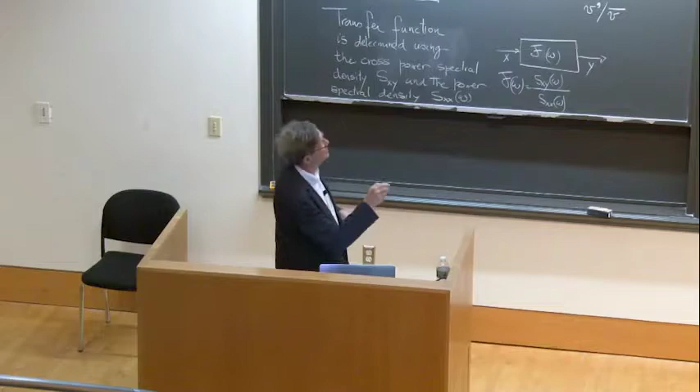Also in this confined case, which is closer to many practical systems, you can explain the switching that takes place, the various modes you are triggering. You start with a given mode, mode 2 for example, and move to mode 1, or you go from a high frequency to a low frequency. You start with a high frequency and then fall on this low frequency. So all this is very nicely explained by this describing function.

All right. So this has been used.

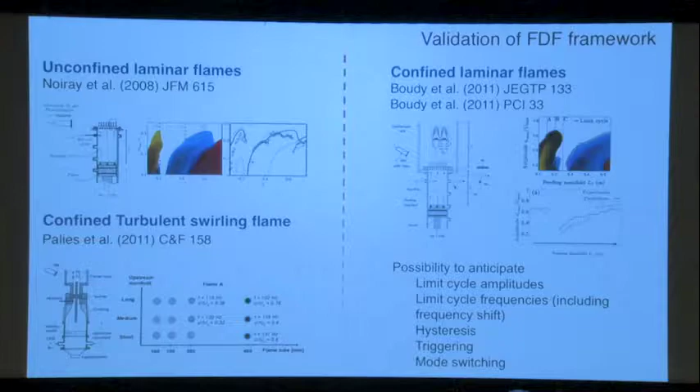We use this framework, for example, to study these unconfined flames. We use the same framework in another configuration that we studied with Paul Paliès, and in this case we wanted to see which configurations were unstable, which were stable. And we use the describing function as well.

By changing, in this case it's a little more difficult to change the burner. You can change the size of the burner. You don't have the piston, but you change the size of the burner. You change the length of the chamber.

You can actually say these places are stable, these are unstable, these are very unstable, and you can actually predict that using the describing function. The predictions are reasonably good and not perfect. We had 24 cases, and a few of them were not very well predicted.

So we did also extensive studies of this configuration, which is generic: a manifold, the injector, and also the chamber.

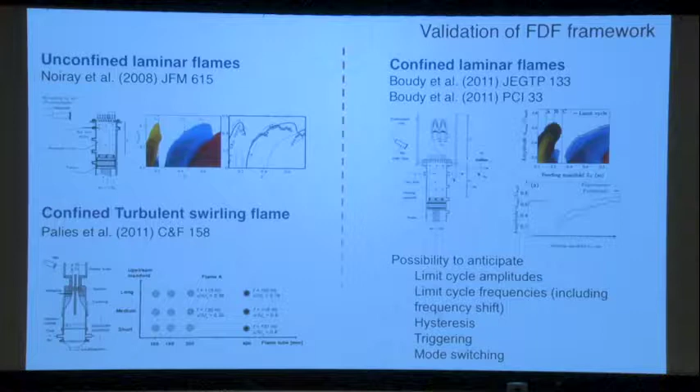There are still issues, because in many situations you don't have a stable amplitude like that. This is a very nice limit cycle, but very often you have something which looks different. When you look at the frequencies, you have the fundamental frequency, but you also have subharmonics and harmonics of this fundamental.

If you plot that, for dynamical systems it's nice to plot this in 2 or 3 dimensions to see what the trajectories of these limit cycles look like. When you have a stable limit cycle like that, what you plot here is the pressure, and the pressure with a certain delay, and you see a trajectory like that.

When you get to this unstable limit cycle, or a limit cycle which also has amplitude changes, you get something different. There are cases where the amplitude does this sort of very strange oscillation. Here you use a 3-dimensional plot for this system, and it looks like that. So you have something which, when you hear it, is not very nice, and what you have is something a little more complicated.

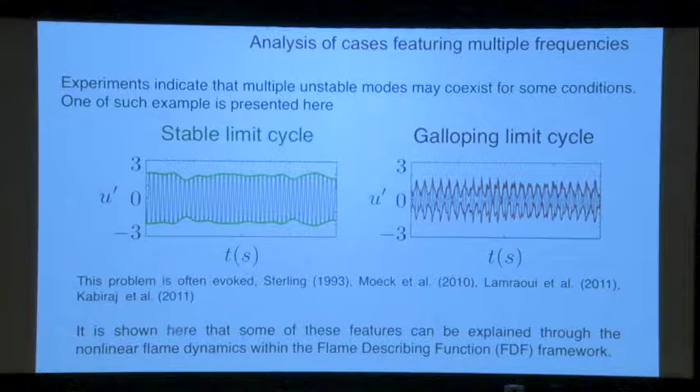This is, of course, not very easy to represent using this describing function. So you have these other cases that require additional work. You have some galloping limit cycles. These are the very stable limit cycles, but then you have these very, very different types of limit cycles.

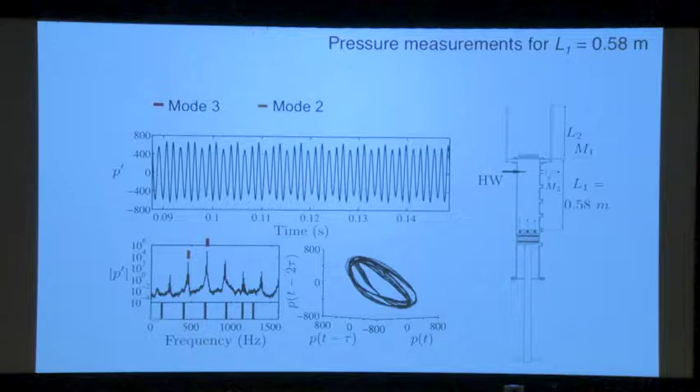There are cases where you actually have 2 frequencies together. For example, in this case you have these two frequencies. So we studied some of that, but this is really too detailed - if you want, you can look at the papers that we wrote on these subjects.

We found certain conditions where, in some conditions, you will have mode switching - you will not have the two frequencies at the same time. In other conditions, you have the two modes coexist. And we wanted to know what were the criteria for this coexistence.

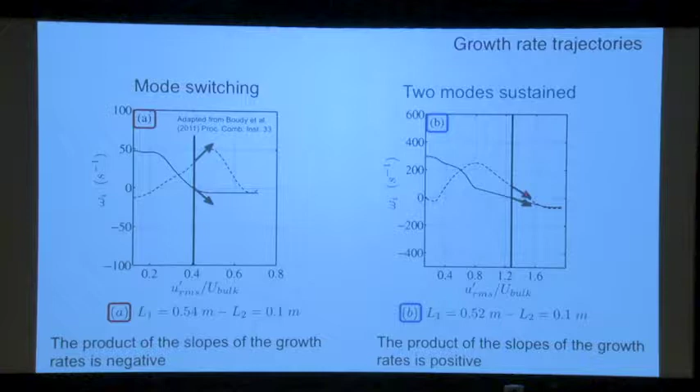Apparently it's the trajectories. In this case, the trajectories have the same behavior, while in this case one is going up and the other is going down, so you have switching. So this is a configuration where you may have two modes, while this one is a configuration where you have switching.

All right, let's drop that.

And now, are there any questions on this describing function technique?

Let's now move to combustion control.

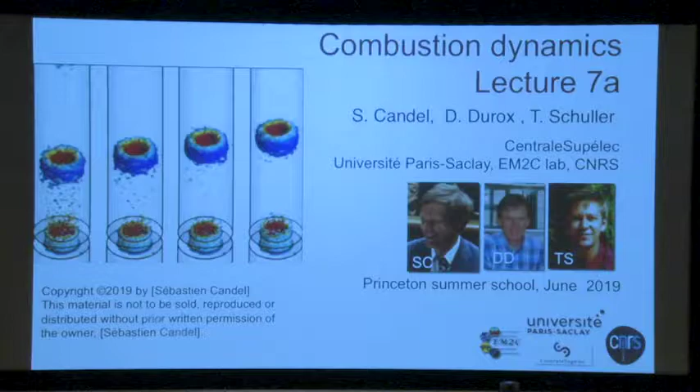We learned a lot about these combustion instabilities, and this is a prerequisite if you want to control flames. If you do not understand what you have, it's very hard to control. But now we have a good knowledge of things. We know that the acoustics is very important. We know how combustion responds to acoustics. We know how to bring things together. We have instability models, we've seen this concept of transfer function. And so now we have to use that for controlling.

So what are the possible concepts here? The situation in general is that you have a resonant system, so acoustic energy, you have a balance of acoustic energy. You know that for the resonant modes, you may have problems. You have an acoustic gain of the combustion process that can be described by the transfer function, describing function. And you have acoustic losses essentially at the boundaries.

There are many possible losses. You may have just radiation outside from the burner. You may have friction at the boundaries. You may have damping by transformation from acoustics into vortices. For example, you transform an acoustic wave into vortices, and these vortices dissipate, and so it's a damping process.

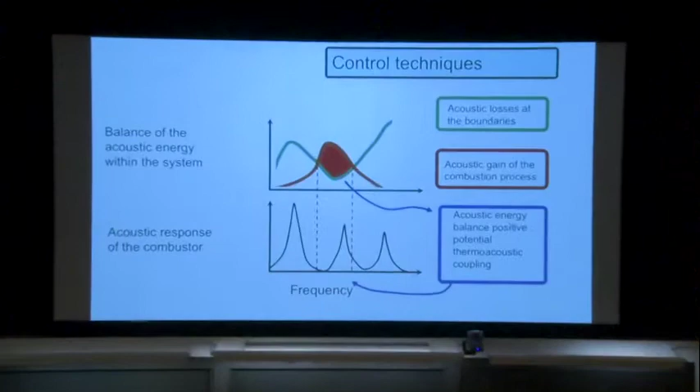So in general, what one wishes, what one can do is to enhance the acoustic damping. You bring the damping to a higher value. You have the gain here, and if you have sufficient damping in the system, it will be stabilized. So this is a way to control your system, by just increasing the damping.

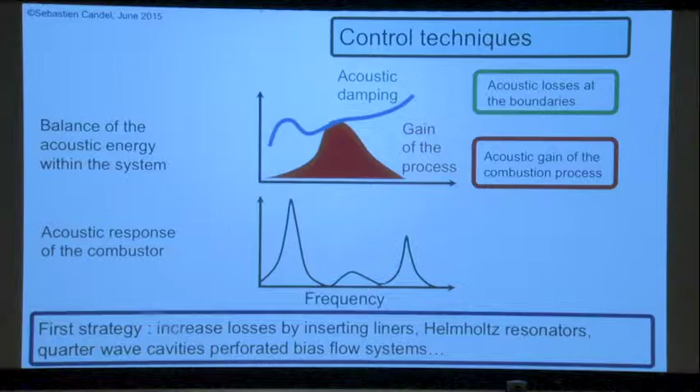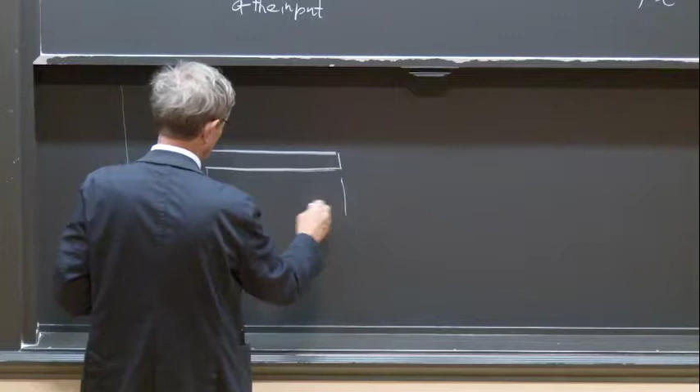What helps you increase the damping? Helmholtz resonators, quarter wave tubes. One simple method is to use these resonant possibilities, and you fit a quarter wave tube. You take a tube which has a dimension, so you have your combustor here, and you place a tube which has the quarter wave size like that, so the length of this tube is lambda over 4.

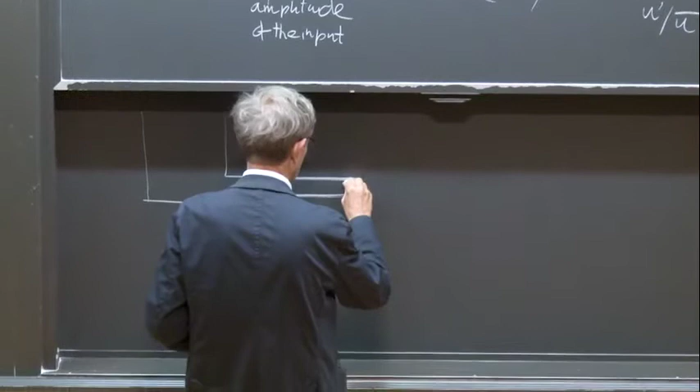And this is, of course, where is the damping taking place? Essentially at this place here. So there is damping just due to the motion that is produced here. So how do you do that in practice? Sometimes you just place a piston at that point and move the piston until the system becomes stable, and you know what is the size of your.

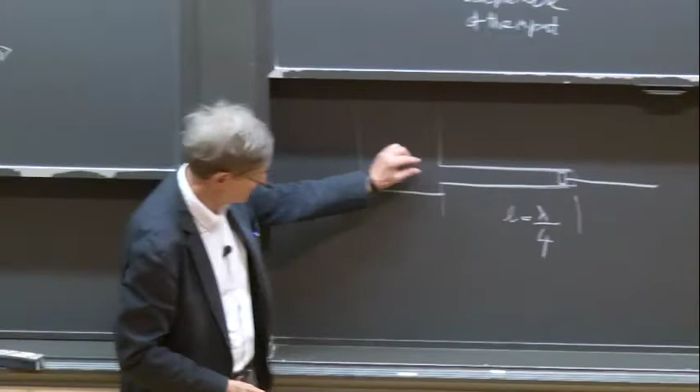So of course the diameter here is not well known. If it's a very small diameter, it will have no effect. If it's too big, it's not good either. So you have to find what the diameter is, but that's a simple technique. We've used that, it works. You work like a trombone and you get your damping at the right place and you eliminate the oscillation.

Another idea is to have flames that will be neutral to oscillations, and this is what I'm going to tell you a little more about. The idea is as follows: you want, for example, when you have a collection of flames, that they respond to oscillations here in opposite phases. This is about what we want.

This is calculations. You send the perturbation here, and this one is going in the opposite direction. It's not perfect, but it's something like that. So is it possible to get something like that? Well, it is possible by just placing an orifice here, and you have a distance between the two, and you get something like that. This is a calculation of two flames. You have to imagine that you have a very large number of flames. So you do this - we call that a dynamic phase converter.

And by using that concept, the flames respond. If they get a perturbation, they respond in opposite directions. So in the mean, there is no heat release fluctuation, or it's very little heat release fluctuation. So you can tailor your gain in this respect.

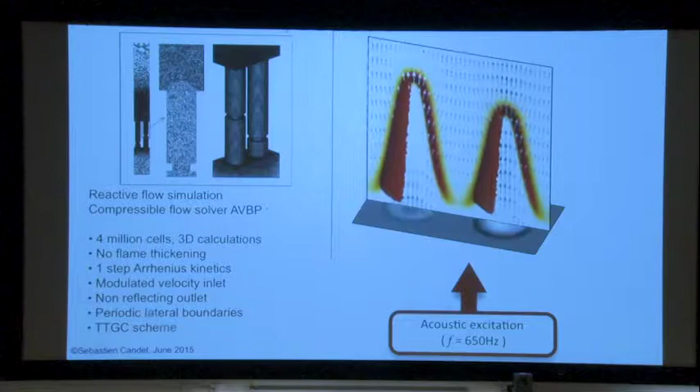This is shown here. You see you have these flames, which you have acoustic waves coming from upstream here. They impinge on the flames here. And because this orifice is displaced with this one, the phase is different. And when one flame goes up, the other goes down - not exactly, but something like that. So you have to imagine a big collection of such flames.

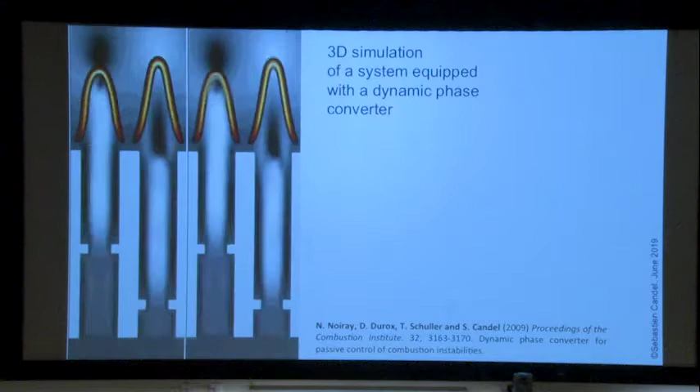So this is in this paper, and I'll give you a little more details on that. The technique is here. You see when the two flames, all the flames, when there is no such system, all the flames act together, and this is the dynamics. When you have these two flames with this equipment, you get something like that. And this will have, essentially, a very little fluctuation in the heat release rate. The heat release rate will remain essentially constant because of this motion of the two flames.

Another way of looking at that is to use active control. There has been a lot of work in this. The idea is you have this loop: flow, combustion, and acoustic feedback, and you place another loop. You put a controller here and send perturbations back into the flow using an actuator, and like that you have a way to modify this loop.

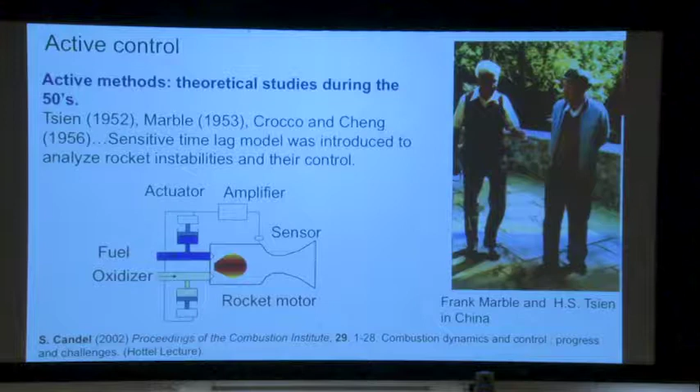This is not at that age - this corresponds to a much more recent photograph. In combustion, there were no demonstrations of that concept in practice until much later.

The early ones were made at Cambridge by Bloxsidge, and we also began a lot of work in this area with Thierry Poinsot. We demonstrated that it was possible to actually do adaptive active control, to use adaptive loops that would adapt to the situations, because combustion is not a simple system - the parameters change and so on, and if it's not adaptive, it doesn't work so well.

Many studies were done in this respect - developing algorithms, developing actuators, control loops.

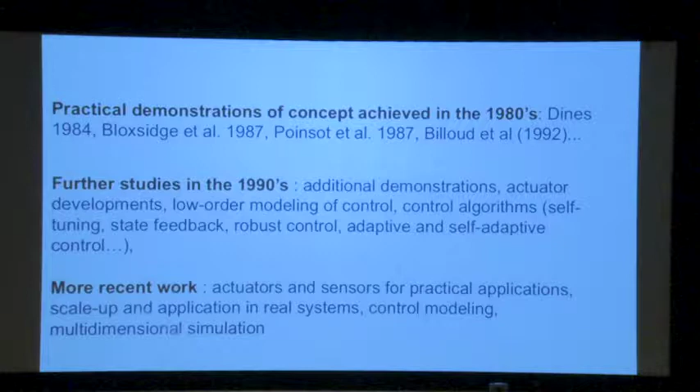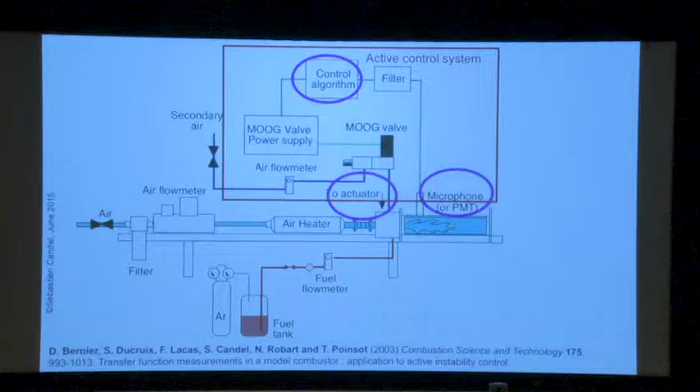This is what we did on a more recent injector - a liquid fuel injector, swirling injector. We had an actuator which was a Moog valve, and again we used the microphone signal through a filter control, and we modulate this Moog valve. The problem with this valve is that it goes up to 400 hertz, so the band is limited. But it's powerful, so you can use it.

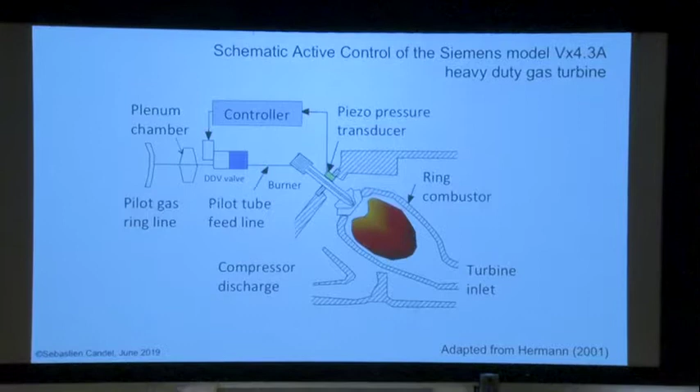Such systems have actually been implemented in gas turbines. There was a gas turbine by Siemens which was unstable, and the only way to get to nominal power was to actually implement something like that. So it's pretty courageous to bring something that was in the lab to a big piece of hardware - put the actuators, there was a controller, a Moog valve, a special mounting of this valve, and you use that to control oscillations in this gas turbine. The person who did that is Hermann.

So in principle, that is possible. It takes a lot of hardware that was done, but you don't want that - in general it's a little too complicated for hardware. So if you cannot do otherwise, this is one possibility, but basically you shouldn't do that.

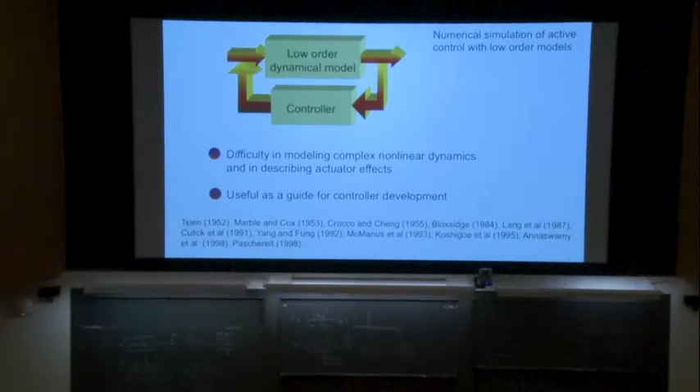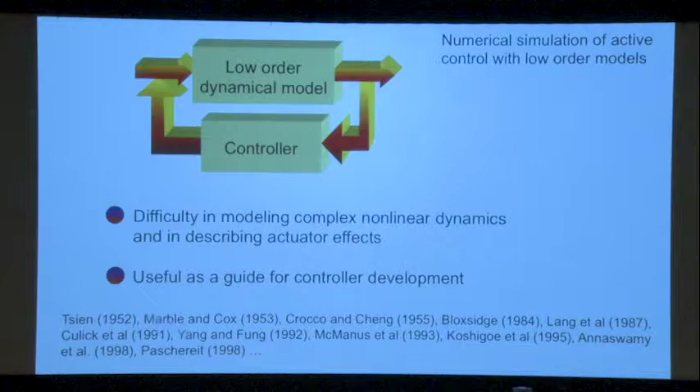A lot has been done in terms of analysis, trying to analyze this sort of thing. Of course, you replace combustion by a low-order dynamical model of the types we've been developing - for example, the one on low-frequency rocket instability - and you add a loop, and then you apply your knowledge in controls. Everything is represented as black boxes: combustion is a black box, acoustics is here, you have the actuator, which is a box, the sensor, the controller. You can, of course, use these transfer function concepts using Laplace transform or Fourier transforms.

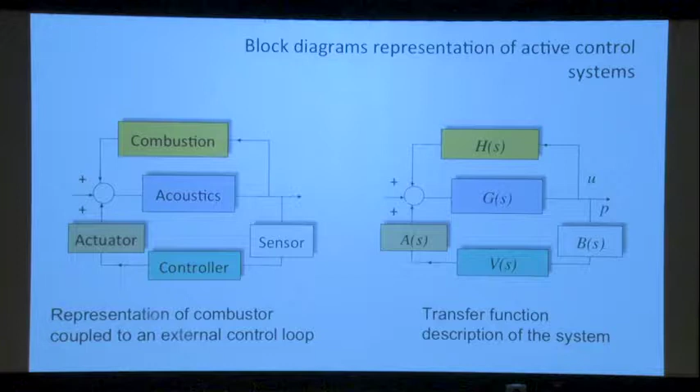One question we were also interested in is whether it's possible to use a Navier-Stokes solver for combustion and implement a control loop. This hasn't been done much. So instead of doing experiments, you do the calculation and put in a control loop to try to see if you can control your flow.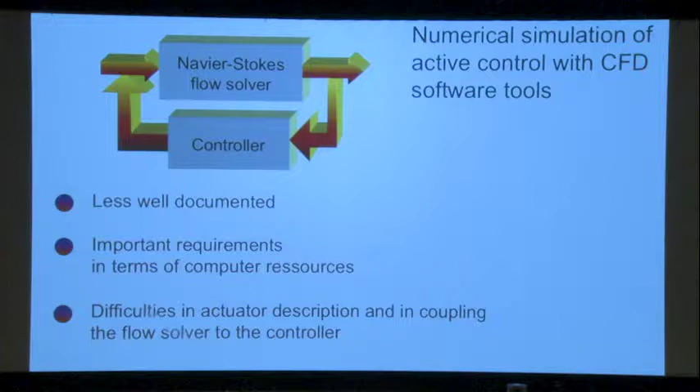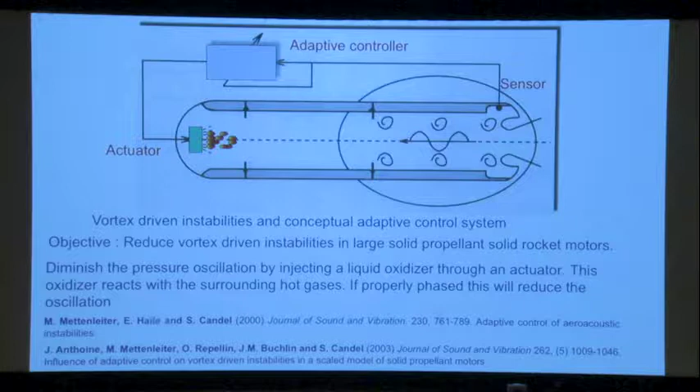At one point we had big problems with rocket engine oscillations, low-frequency oscillations produced by the baffles which separate the solid propellant. You have solid propellant here, baffles that protrude into the flow, producing vortices. These vortices impinge on the nozzle, produce pressure waves, and this resonates, creating more synchronized vortices. The idea was to inject oxidizer, since all of this is a reducing ambience, using an adaptive controller to reduce this vortex shedding and impingement on the nozzle.

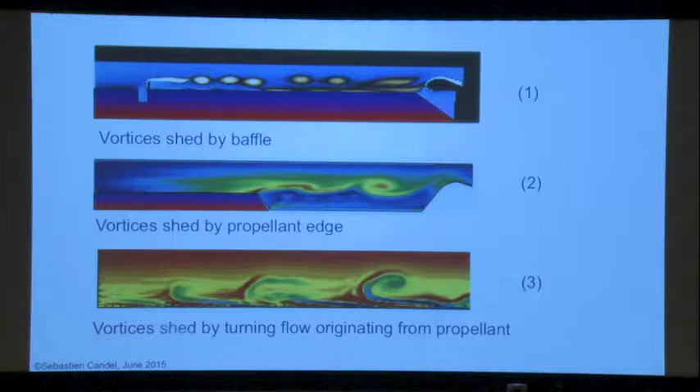This is exemplified here. You see vortices that impinge on the nozzle, producing pressure waves. There are other types of vortices, for example produced at the edge of the solid propellant that impinge on the nozzle. You even have vortices produced just from the surface of the solid propellant.

If you want to know the frequency of this process, there's a famous result by Rossiter, which tells you the cavity resonance of such a situation. The period of oscillation multiplied by a certain number, corresponding to the number of vortices, equals a convective time, an acoustic time, and some time representing the interaction between the vortex and the nozzle.

If you consider that delta t is a fraction of the period, you finally get a frequency expression. It's a coefficient, let's say 0.6, times the velocity u in the system divided by the size of the cavity. M is the number of vortices, minus alpha, which is a factor you don't quite know, and the Mach number also appears here. So you get an idea of the frequencies of these configurations.

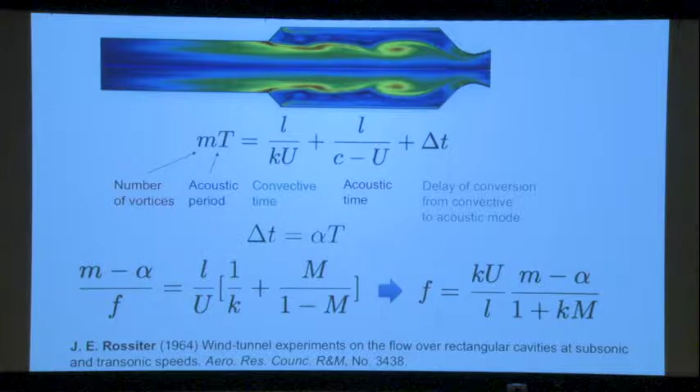Of course it was too difficult to do this in a real rocket engine, a solid rocket - it's very expensive, even in a small solid rocket engine. So what we did first was try it in a simpler configuration which has some of the same features: you have a baffle, you have the nozzle here.

Instead of injecting reactant, you have a loudspeaker. Is it possible to control the vortices in this cavity using active control with a control algorithm? This is a paper we published on that. The experiment was done at the von Karman Institute in Brussels - we brought all our system, electronics and adaptive controller there, plugged it into the system, and it worked.

The system oscillates at various frequencies - these are the modes of this system. You can see it reaches pretty high levels in decibels, 136 decibels in these regions.

This changes as we change the velocity inside the system. By putting in the controller and operating it, you see the levels are much lower here, even there. There's a little bit here, but basically you eliminate these - this is brought down.

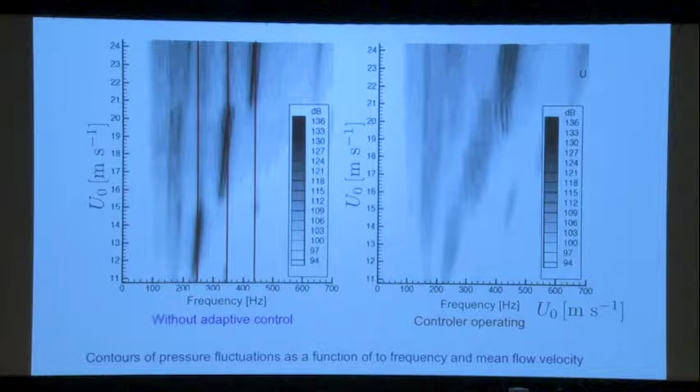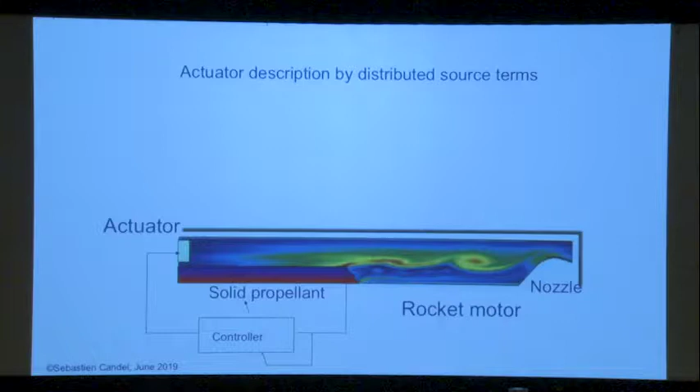It's also interesting to try to see if that can work using numerical work. The difficulty is you have to implement that - in this case, you have to bring in sources which represent the actuator, and implement that into a Navier-Stokes code. That's what we did.

What's important is that if you put a source of reactants here, you should not forget that the source will also have some energy. If you forget that term, this is very bad. So if you don't forget it, if you place it properly, the actuator is the injection of reactants right here.

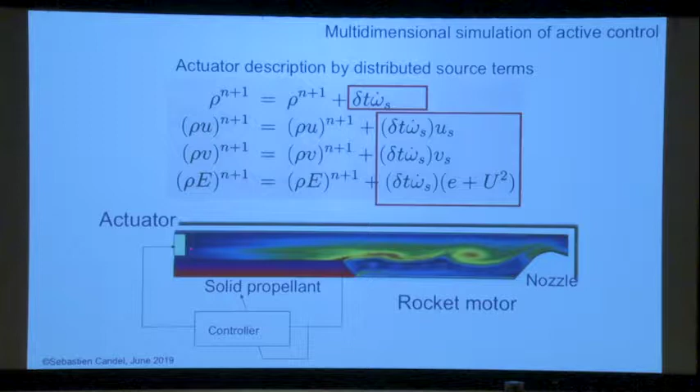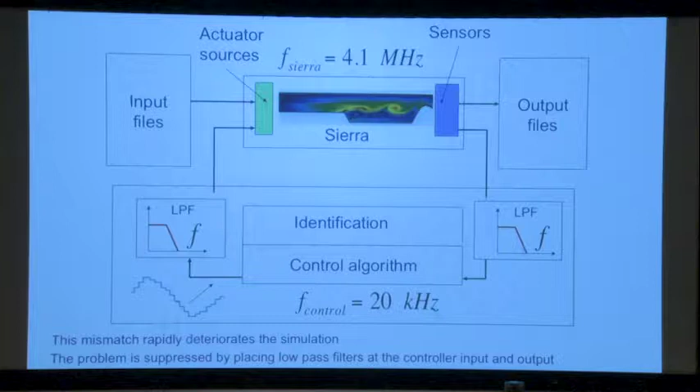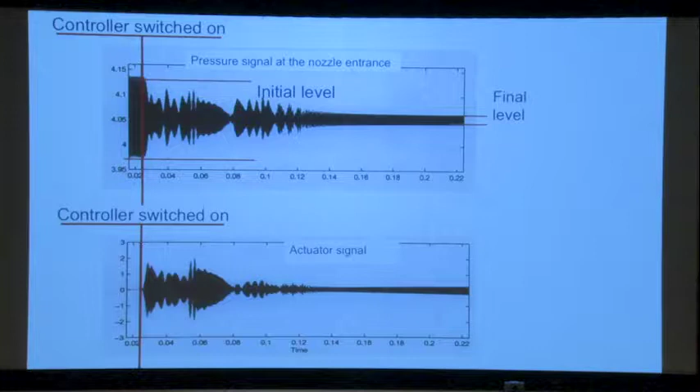And what happens is basically you start with vortices which are like that, and you change the structure of the flow inside the cavity. And this one is less resonant than that one, so the level of fluctuation is lower. It's a first exercise in trying to do active control as a loop on a Navier-Stokes solver, on a calculation.

So that was, of course, we haven't gone to implement this system. It wasn't sufficient. It works, but if you look at the difficulty of implementing that, it's too difficult. So you have to design the engine so that you don't have this, so that the vortices are not too strong, and so that the oscillations, because these oscillations produce vibrations, thrust oscillations, and the whole rocket is vibrating at these are very low frequency events. The frequencies here are much higher because we did the calculations in a smaller device.

All right. Do you have any questions on these?

So what I want to discuss now is this idea of being able to have the flames less susceptible to perturbations. This is based on the work of Nicolas Noiray. He is now a professor at ETH in Zurich. The whole background is flow, combustion, acoustics. We want to control that. The solution: active control, we will discuss that. Passive control.

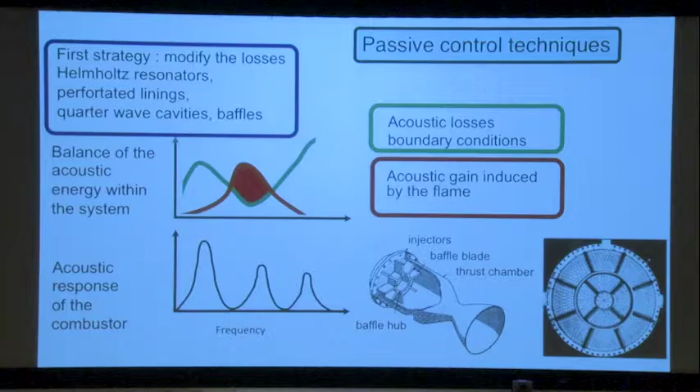In terms of passive control, you may enhance losses at the boundary. You may put baffles. For example, in the F1 engine, the final configuration of the F1 engine had baffles. You see, you have baffles here. And this breaks the resonance, they reduce the resonant levels of the most destructive modes. So this is the final configuration that was implemented in the F1.

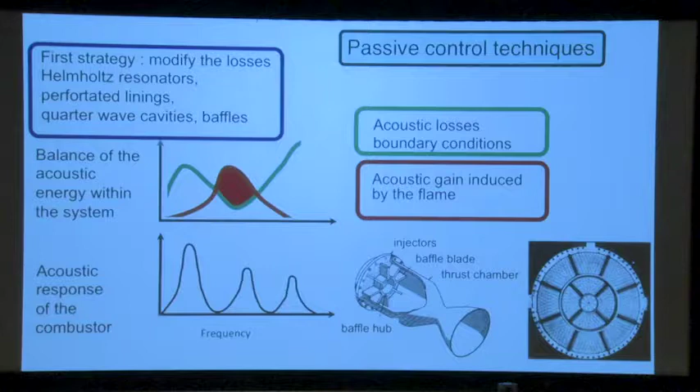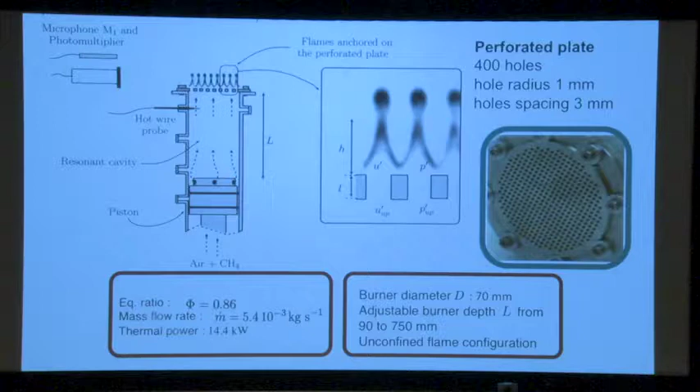Of course, one thing that we would like to see is, is it possible to reduce the gain of the flame? And the idea is, again, we want to reduce the gain. This is the strategy: to modify the gain by acting on the flame dynamics. So what we use is this device, and the idea is that we would like to have these flames operate in a different manner, desynchronize their operation.

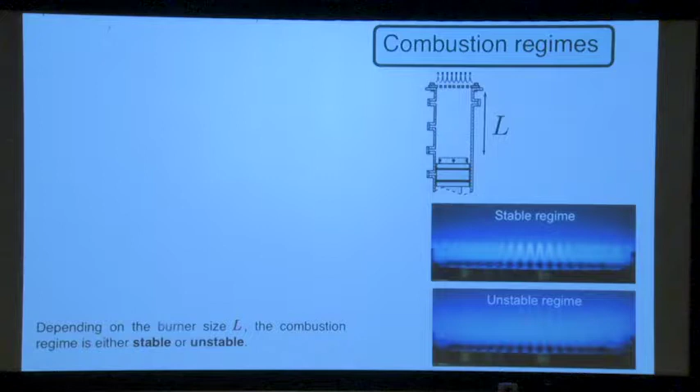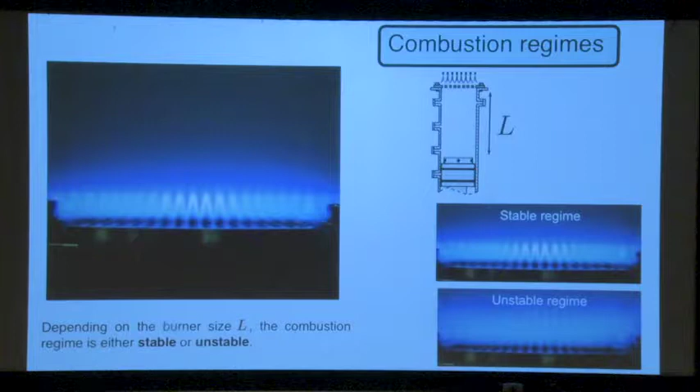So you remember this is a stable regime, and in the unstable regime, the flames are oscillating strongly in this direction. We've seen that a few times. This is stable here first. And if it's becoming unstable at this frequency, it's like that, so you have this. So this is what we would like to control.

And in this case, we don't want to use passive techniques. We know that this is a possibility. We want to use something which is not also active control, because active control has these difficulties of implementation. So that's the mechanism that we want to modify.

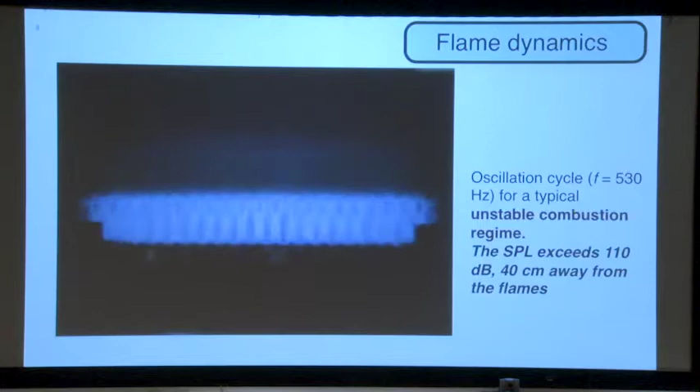And what is visible here is that all the flames act in phase. They are all together. They produce this heat release pulse. So the idea is to have the flames moving in a different manner, to modify this. This is all synchronous. They shed this strong pulse of heat release. So we want to change that.

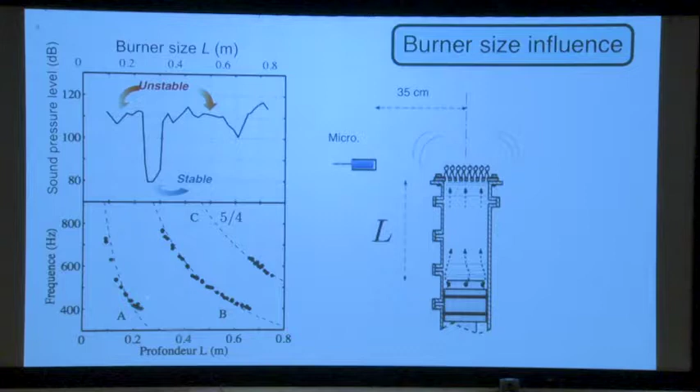Now, if you want to change the behavior of the flames, the delays that you can get in acoustic waves are very small, because the speed is the speed of sound. So you cannot have big delays. Acoustics doesn't provide big delays. Of course, if you are on a very large distance, you have a good delay. But on a small distance, you are not able to do a delay.

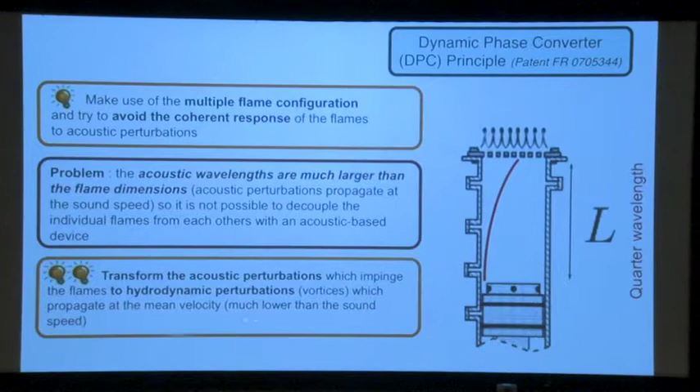So the thing is to transform the acoustic perturbation, which impinges on the flames, into hydrodynamic perturbations, vortices, which propagate at the mean velocity. This velocity is much lower than the speed of sound. And then you can change the phase with a much better capacity.

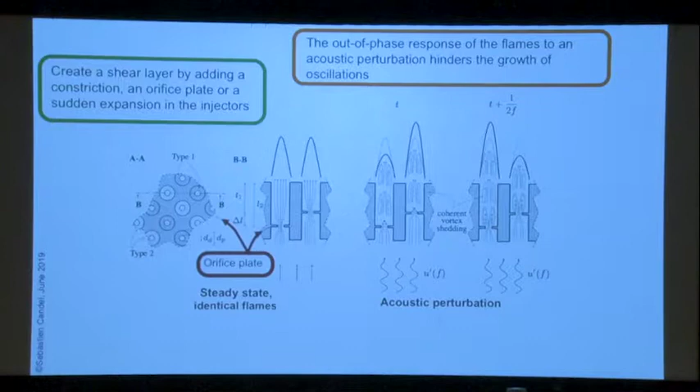The idea is to be able to change this phase. So this is what we invented, and it was patented. You have an orifice here and an orifice there, and you include these orifices in these channels. What you do is produce vortices, and because you have this distance, you have a delay which corresponds to this distance. These vortices will impinge on the flame, and you will have situations of that kind, and then situations of that kind at half the period later. And so when you have the acoustic perturbation, you make here a

phase conversion. You include a phase due to this process. And it's very simple. You just put an orifice, and the orifice converts your acoustics into a vortex mode. And the vortex is then advancing at the speed of the flow. So the acoustics was at the speed of sound, while the vortex is at the speed of the flow. Does that work? Yes.

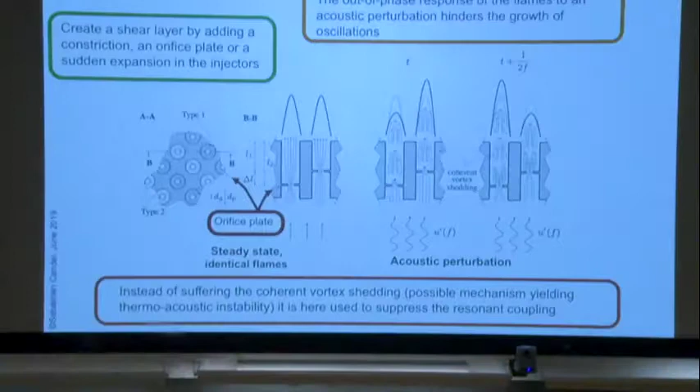You see, instead of having... to suppress the resonant coupling, how do you determine this phase? Well, the phase is equal to omega times delta L divided by UCV, the convection velocity of the vortices. So delta L has to be equal to UCV divided by 2F to have a delta phi equal to pi.

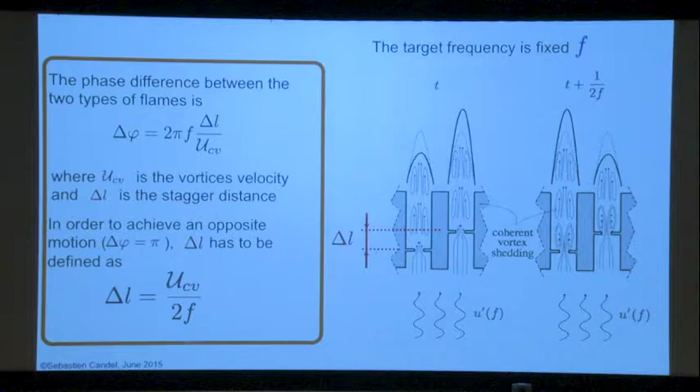So that's it. It's very simple. The idea is very simple here. You put these orifices, they are displaced by delta L. And half of the flames have one type of orifice, the other half have the other type.

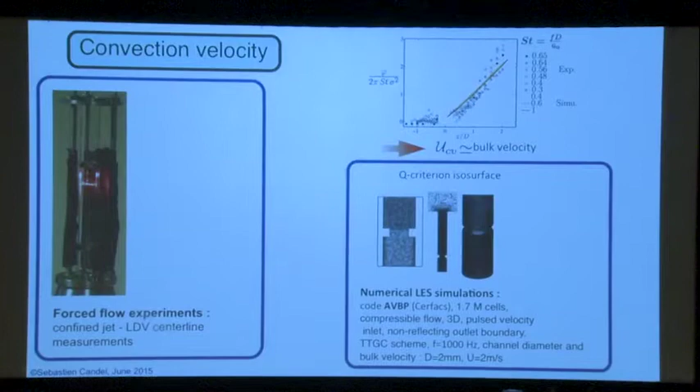So now the first thing to know is, is it really true that you convert acoustics into vorticity? This has been verified. We can definitely verify this, for example, doing calculations, but also in experiments. For example, we built this experiment. You have a loudspeaker at the bottom, you have the orifice, and you see the vortices very clearly.

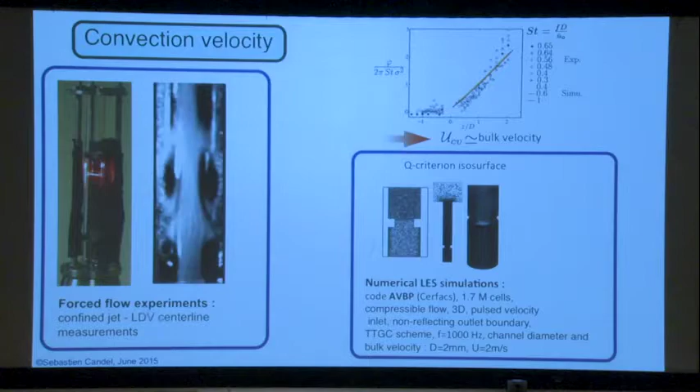So you put a simple diaphragm in a duct. You see you have the duct, you have a diaphragm here. You arrive with acoustic waves here, U prime, and here you produce vortices. And these are not negligible vortices. They are very powerful.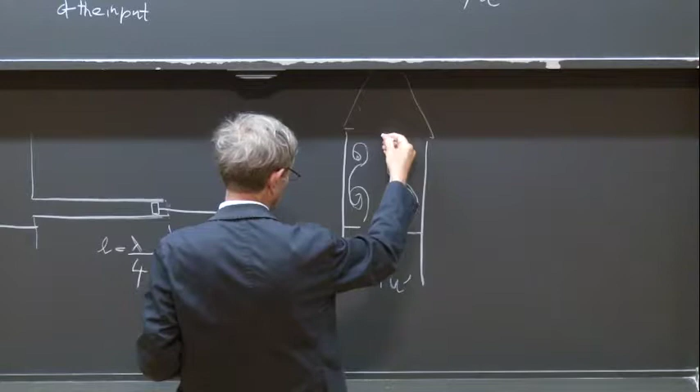And these are the perturbations that will act on the flame. The flame would be here. And what you do here is that instead of having these acoustic waves propagating to this point, you have these vortices propagating to this point. And in the next channel, you put the orifice here. You make sure that the distance between these two is reasonable, delta L, and the vortices are shed here.

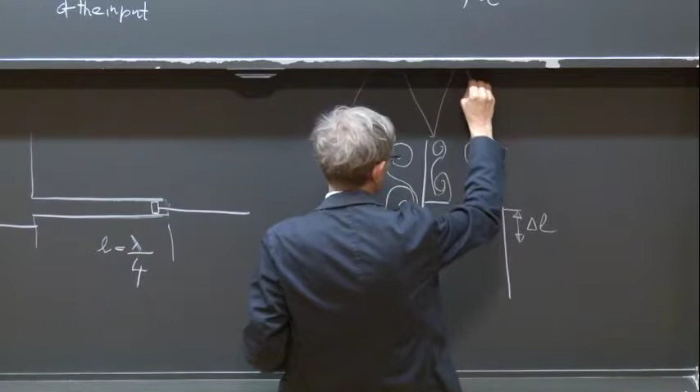And you have a phase between these vortices. And so this flame will be impinged by these vortices. And so it's very simple to implement.

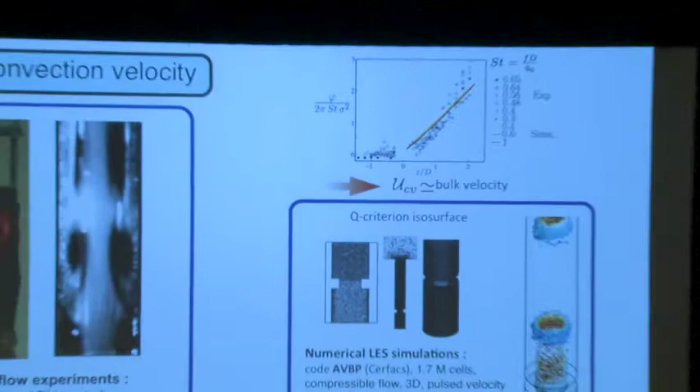We did also calculations of these vortices. This is the grid that was used. It's an unstructured grid, and you definitely can see the vortices, and they give you the convection velocity. You can determine in this way the convection velocity.

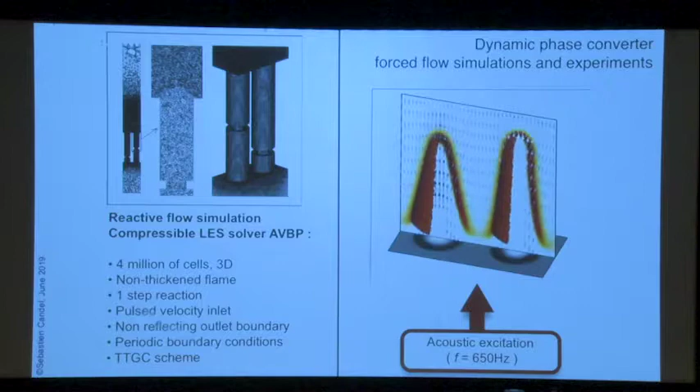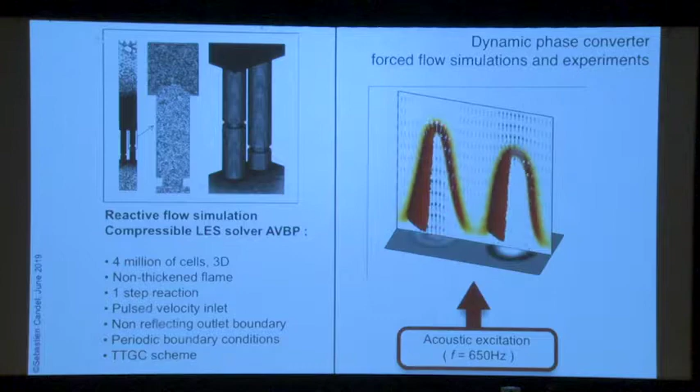And we did also directly these calculations that I've shown before. This is not a simple calculation because you have laminar flames, so you have to calculate the laminar flames here, and you can do that. And you can see that these flames behave somewhat like what you want. There are some movements which are not quite what you thought you would get, but basically it does. So instead of having the two flames acting in phase, you have them acting in opposite directions. This is a cut through these calculations. So this is how it looks like.

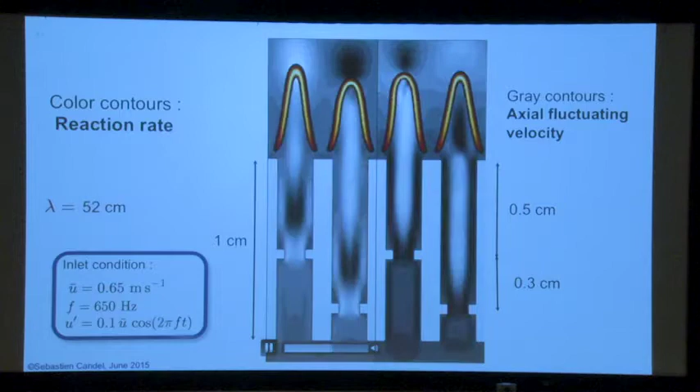We were very happy to do such calculations, because it's not too easy. It takes a little effort to have these flames, and then you transform the acoustics into these convective modes, and they impinge on the flames. And now, does that work in practice?

This is what we did to control this frequency of about 660 hertz. So without the system, with the system, sorry, if you do LDV at these points here, you do see that the two signals are exactly out of phase. So the flames will respond with a pi between them.

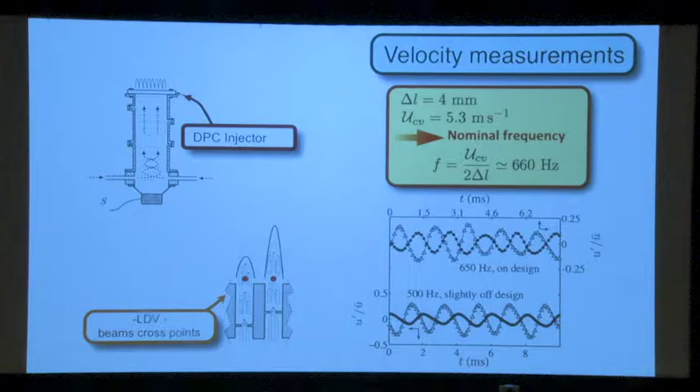And what happens if you are off design? Well, still you get something like that. So one flame is going, one velocity is like that, the other one is like that. Off design, you will get something. It works even around the frequency of your design. In principle, this will work.

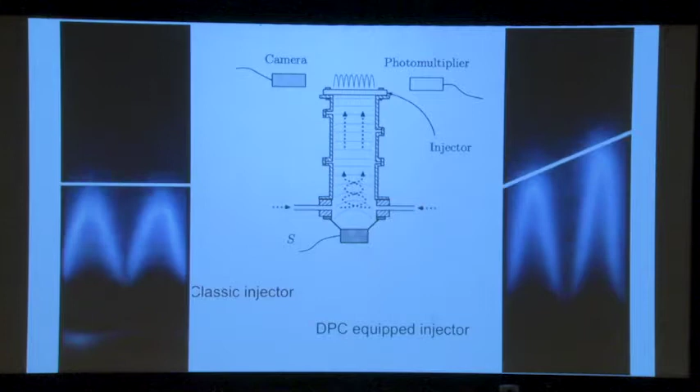And if you put this dynamic phase converter, which are essentially these two orifices, you see that the flames execute motions which are in opposite directions, which is emphasized by this straight line. It's nicer, otherwise the eye doesn't see it so well. Like that, you see it better. And it is true that...

So now these are made with the loudspeaker. You send an acoustic wave by the loudspeaker and you see the chemiluminescence. This is without the phase converter. And when you do the same, but you put the orifices and so on, you see the chemiluminescence is essentially constant here. So the intensity doesn't change so much because the flames are out of phase.

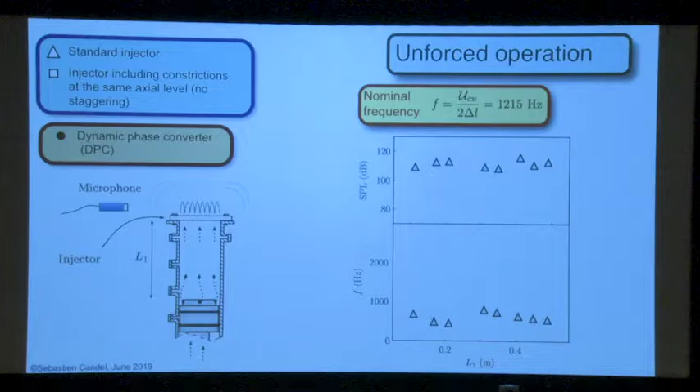And does that work for a situation where you have self-excited oscillations? Yes. This is the level of oscillation of the system for all these lengths here. And when you put the orifices, you are below. You see, the gain is about 20 decibels here. Sometimes it's less. But here it's on a fairly large scale of lengths. So basically it works, it suppresses the oscillation.

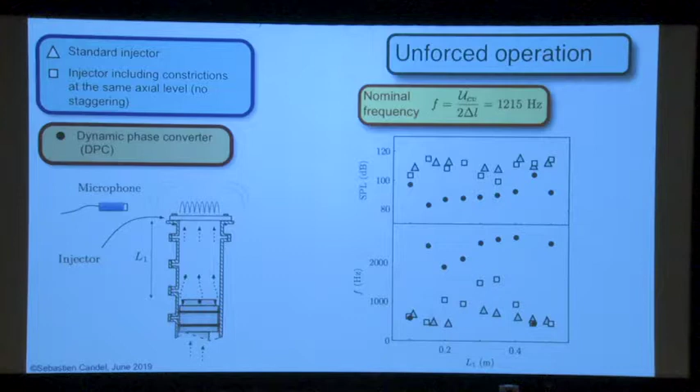There is still something coming in at a higher frequency, but at a lower level. The oscillation level is reduced, but you do get some high frequency here. So if we don't have the system, then you're here. So it's simple.

Very little requirements in terms of space. There is a minor modification of the injection geometry, and it's rather broadband effective. So it's a demonstration that by properly designing this injection system, you can actually reduce the gain very much, and then you reduce the oscillation.

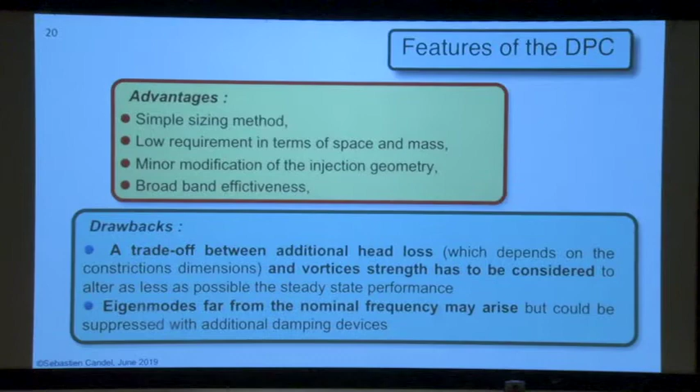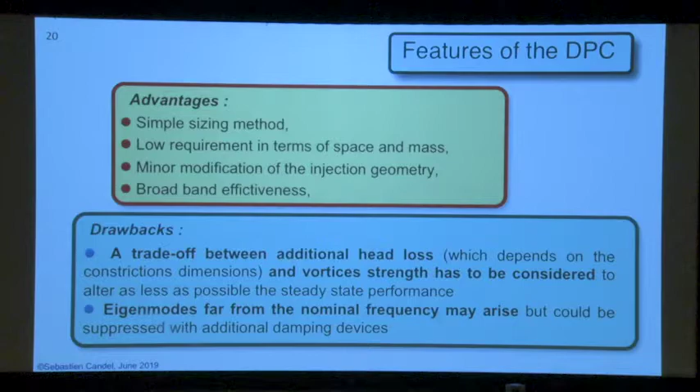Some drawbacks: you have some head losses, and you have also the eigenmodes, which have other frequencies which may arise because you suppress the lower order modes, and then you may have another one which will occur. But basically, it has some advantages. So at least we thought we had a way to fix such instabilities. All right, what reactions, what questions?

We got the silver medal for this paper at the Combustion Institute. The silver medal is for the best paper at a given symposium. That was the symposium in 2008, and it was considered a very original paper. I think it is, I haven't seen such an idea elsewhere. So I think it was pretty original and effective.

Yes, like you mentioned, there is a chance that with these new dynamics you can introduce maybe a new mode. Yes, because you have all these other possibilities, you have all the modes that are here. So you eliminate one, but another one may occur because there is energy there, and you are not addressing it.